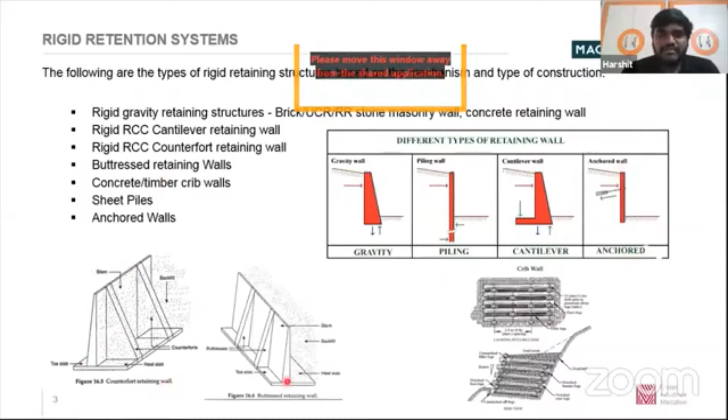The conventional retaining structures would be gravity retaining structures, which are built with bricks or rubble masonry stone walls, or it could be a cantilever wall, an anchored wall, or a piling wall. It could be a counterfort retaining wall, or a buttressed retaining wall, or concrete crib walls, wherein concrete logs are placed, and into the concrete logs the soil or stone will be added. So these are the general conventional retaining systems available in the market. These have certain disadvantages.

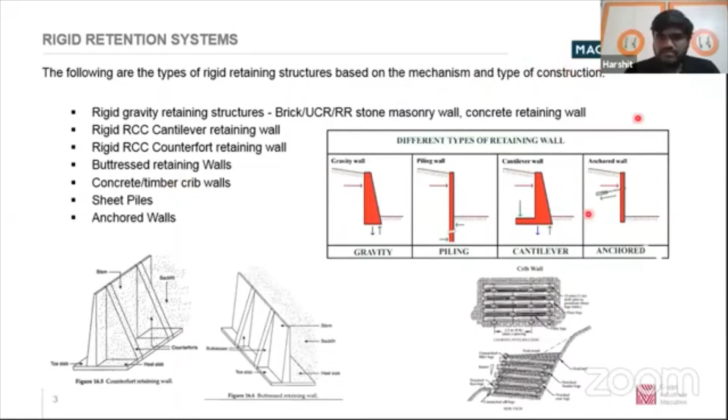Yeah, these rigid conventional retention systems have certain disadvantages. These are usually limited to certain heights. Beyond a certain height, we may not be able to construct this kind of retention system. These retention systems cannot tolerate large differential settlements, as they are rigid and not flexible in nature. So even slight settlements may affect the whole structure.

Since these are heavy structures, we may have to bear large foundation pressures. Because of these large foundation pressures, we may have to go for deep ground improvements and all, so it will again become costly. These kinds of rigid structures have poor seismic response because they attract large inertial forces in case of seismic activity, and hence failures may occur due to their rigidity.

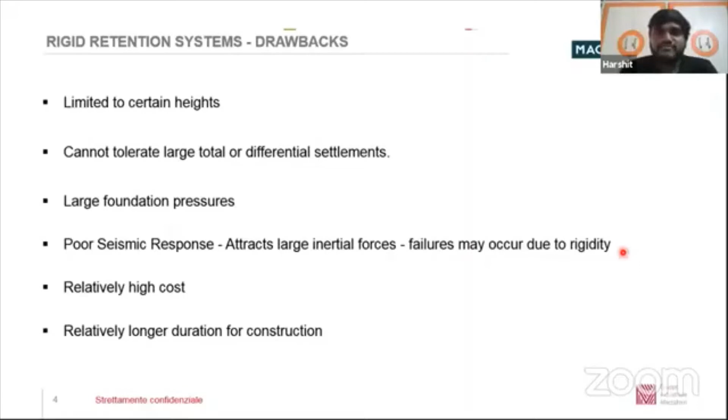And it is relatively high cost, and it also takes a longer duration for construction because of the various bar bendings and curing requirements. So to avoid all these drawbacks, knowingly or unknowingly, a reinforced soil system has been used from the ancient past, and reinforced soil walls have emerged.

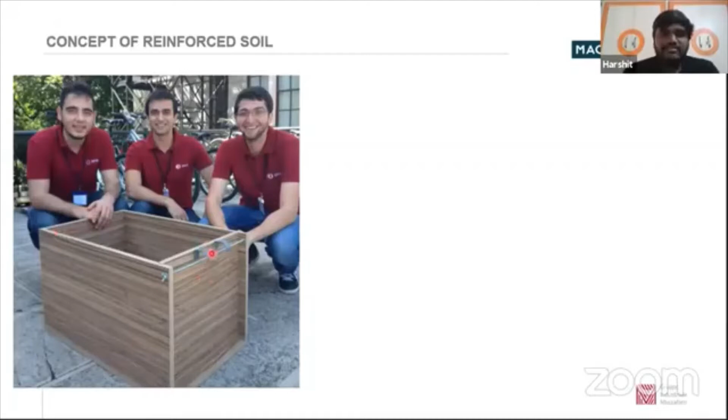And to understand more about the reinforced soil concept, let us go through an experiment. So here you can see a wooden box. On one side of the wooden box, we have a detachable frame, so this can be detached. What they are trying to do is they have taken a piece of paper and they are trying to replace this wooden frame with it.

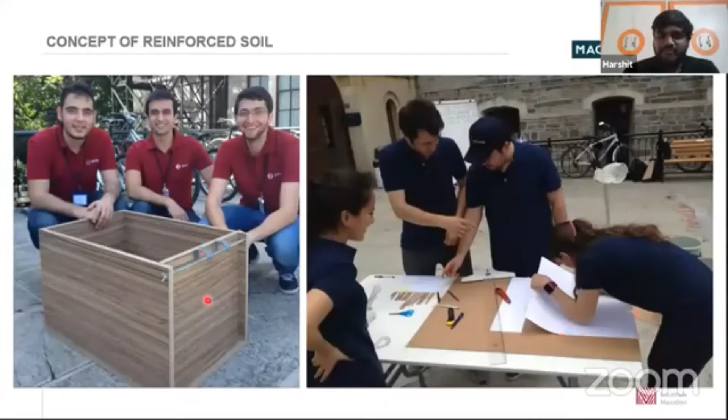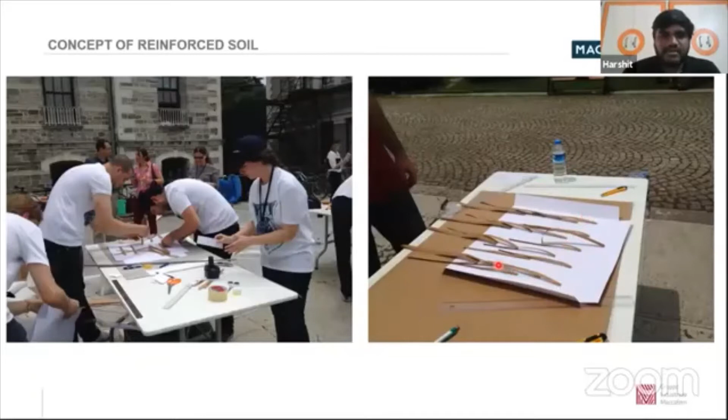And now with this piece of paper, they are adding certain reinforcement. They are cutting strips of paper and attaching them to this sheet at certain levels. Now here you can see this sheet. In this sheet, we have attached reinforcement strips, also a paper kind of material, at different levels. And now they are placing this paper along with the reinforcement strips along one side of the wooden frame.

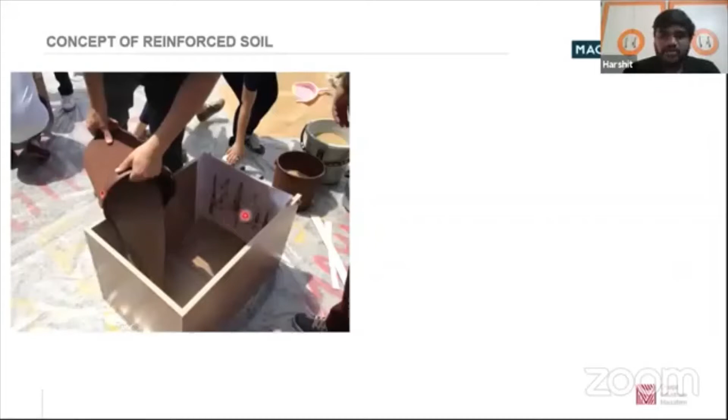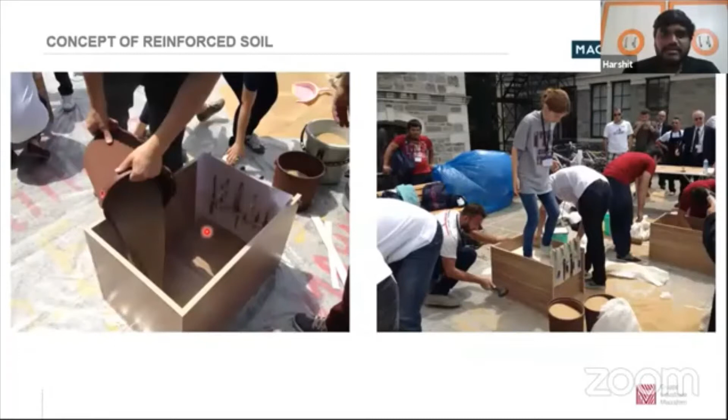So now they are pouring soil into this wooden box, and as you can see, they pour it to a certain level and place the paper strips, and then again they pour soil and compact it. As you can see here, they are compacting it.

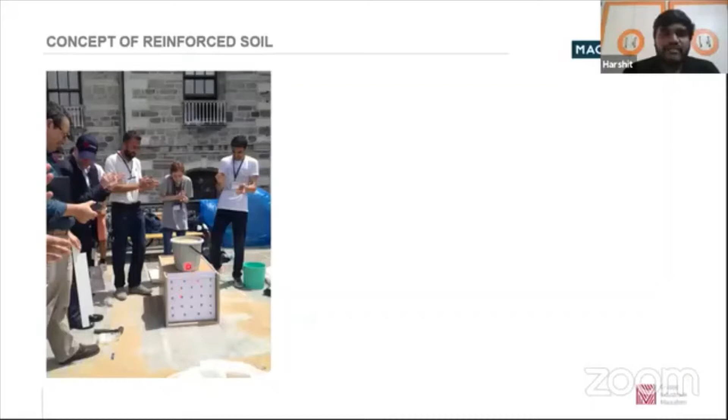And now, with just a sheet of paper and even with a load through a bucket full of soil, this structure, with a normal sheet of paper and certain strips of paper as reinforcement, is not failing anymore. So it is able to retain. As you can see, they have put a lot of load over the soil. Even with the extended loads, this is not failing.

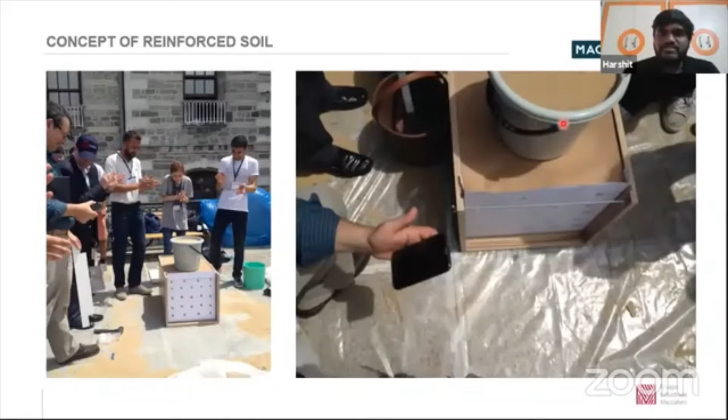So this is the concept of the reinforced soil wall. Basically, as you all know, just like RCC structures, just like concrete, soil is also strong in compression but weak in tension.

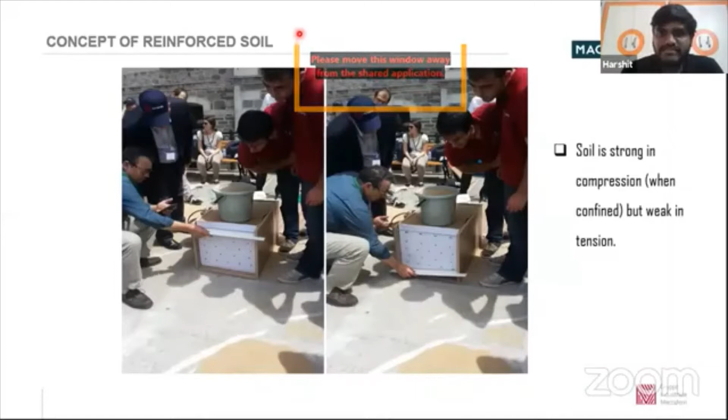So moving further, what is a reinforced soil structure? Reinforced soil structures are a form of mechanically stabilized structure that incorporates planar reinforcing elements which can bear tensile stresses. Whatever reinforcing elements we provide in the soil take the tensile stresses. The source of this resistance to tension is the internal friction developed between the soil and the reinforcement. So the basic transfer mechanism in reinforced soil structures is friction generated between the reinforcement and the soil.

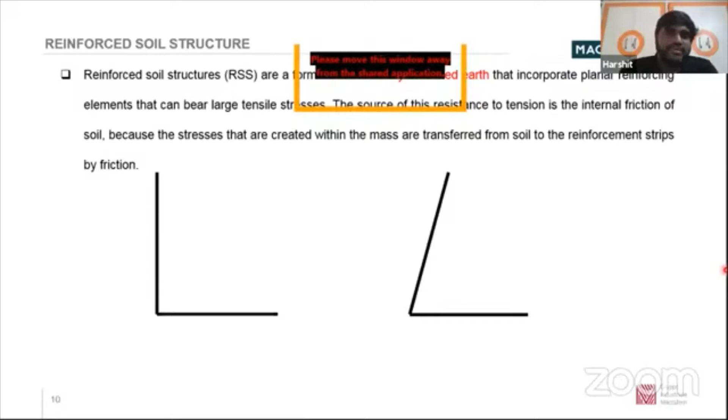So now, what is meant by a reinforced soil wall and what is meant by a reinforced soil slope? We need to understand what is a slope and a wall. When the slope angle is greater than 70 degrees, it is defined as a reinforced soil wall as per the codal provisions. And if the angle is up to 70 degrees, it is considered a slope.

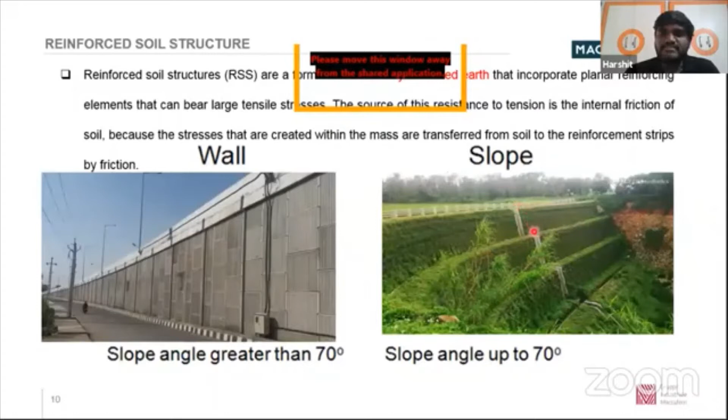As you can see, this is a vertical wall, so this can be defined as a reinforced soil wall. Similarly, here this is constructed as a slope and it is less than 70 degrees with the horizontal. This can be considered a reinforced soil slope. So this is how we differentiate a reinforced soil wall and a reinforced soil slope.

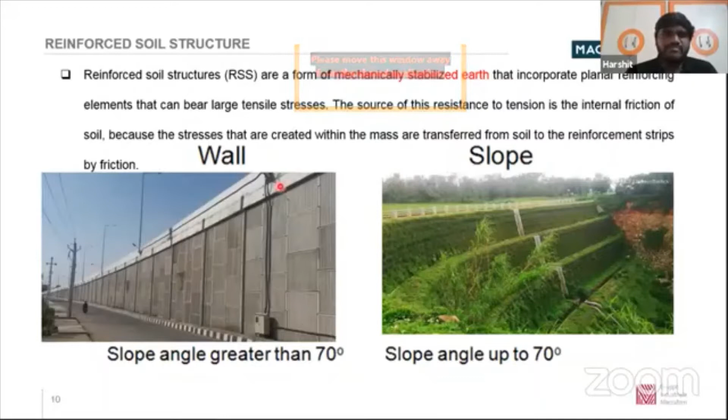So now, what are the basic components of a reinforced soil structure? In general, there should be a facing element. The facing element is one of the major components, which holds the soil particles in place, so it should not allow them to fall down.

So this is just a facing element. And then there is a reinforced soil and retained soil. Fill material is important, since the fill material is the major one which is used to generate the friction between the reinforcement and the soil. So this fill material selection will also be important.

This is also a major component. Whatever the fill which is behind the reinforcement, geosynthetic or steel reinforcement, this soil is called retained backfill. And another major important component is the drainage media. Water may percolate into the soil and it should be able to transfer. There should be a separate medium to transfer this particular water from the reinforced soil structure.

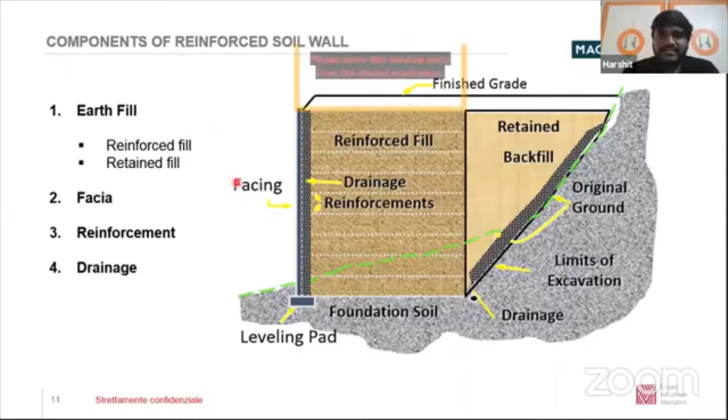These are the major components of any reinforcement: the facing elements, the fill material, the drainage medium, and the reinforcing elements. So let us go into each thing one after other. So reinforced soil wall fascia. Let us go with the fascia. These are the classification as per fascia.

So now you can see there we can go with different fascias. One could be a soft fascia, wherein, as you can see here, there is no particular fascia like that. You will be having geogrids or wraparound fascias. So we'll be having soil filled in the geogrids with the help of one geotextile as a separator.

And then we will be having stone fascia, like gabion boxes will be there in which stones will be filled. This is called stone fascia reinforced soil walls, in which geogrids can be placed as a reinforcement, or normal meshes will be placed as a reinforcement.

Other fascia that could be possible in case of reinforced soil structures would be modular blocks. Modular blocks are nothing but the small blocks, just like brick-like structures, which is having a height of around 0.2 meters and the thickness will be around 0.3 meters. So these are just like brick-like structures, and in between geogrid layers will be placed.

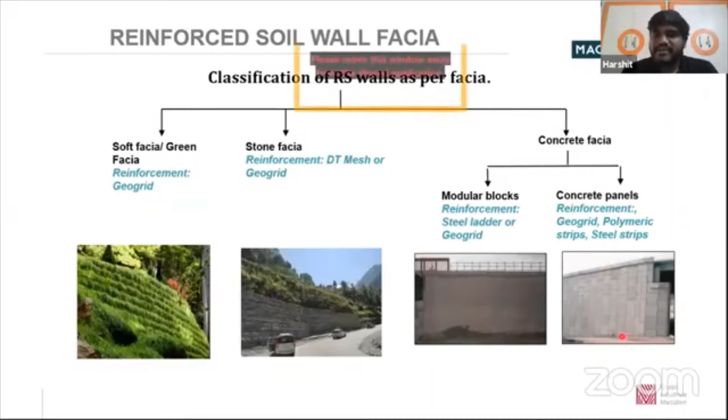And similarly, there are discrete concrete panels. Here you can see these are the concrete panels, wherein height of these panels would be around 1.5 to 1.6 meters and the width will be around 2 to 2.2 meters. So here various concrete panels will be placed one over the other, and then reinforced soil wall or slope will be formed. So these are the different kinds of fascia that is possible.

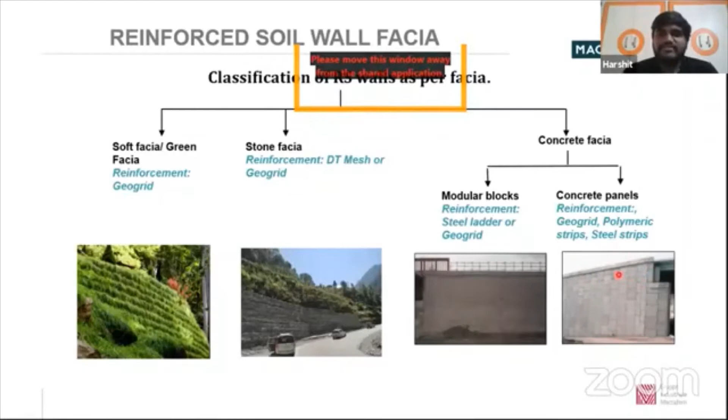And coming to reinforcement material, so there could be a geosynthetic reinforcement or a steel reinforcement possible. So if we go to the geosynthetics, when I want to define the geosynthetics, they are nothing but the planar materials which are fabricated or manufactured from polymer materials, and these materials, when they are in contact or used for geotechnical purposes, are called geosynthetic materials. So what kind of geosynthetic materials can be used in reinforced soil walls or slopes anywhere?

So the different types of geosynthetics that we can use is geogrids. Geogrids are nothing but grid-like structures which are formed from fibers. As you can see, these are the grid-like structures, formed from fibers. These are woven or knitted fibers, wherein they will take various fibers and knit them. And these are bonded fibers.

Here they will take various strips, geosynthetic strips, bonded with each other through thermal bonding, and they are formed. These are extruded geogrids, wherein a plain sheet of geosynthetic material, from that they will do punching and extrude this kind of geogrids. And it could be a geocomposite, wherein it not only does the purpose of reinforcement, it might also do the purpose of the drainage function also. These are called geocomposites. And then we can also go for geotextiles.

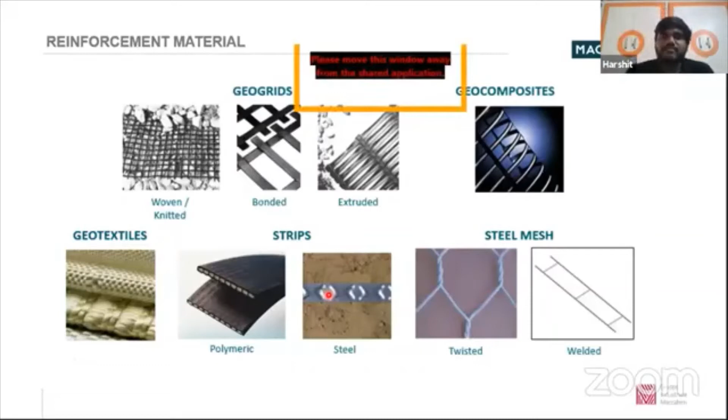With the advancement of geosynthetic materials, now we have totally avoided using steel strips, and in most cases only geosynthetic reinforcement is used, either in the form of grids, geotextiles, or strips. Geosynthetic materials are being used.

Now the third major important material in case of reinforced soil structures is the fill material. As said earlier, it should be a granular material. If I use a cohesive fill, the problem would be that friction between the soil and the reinforcement will not be developed. So in case of reinforced soil, it is always advisable to use a granular fill material.

The design will also depend upon the properties of the retained fill. Retained fill is nothing but the fill beyond the reinforcement. Whatever the geosynthetic reinforcement is providing, the fill beyond this reinforcement is called retained fill. These properties also need to be finalized before going for any designing purpose.

Not only normal fill, even mechanically stabilized soil or solid waste like fly ash or pond ash can also be used as a fill material in case of reinforced soil structures.

So what are the recommended properties suggested by Indian guidelines? The recommended properties for reinforced soil are: angle of internal friction shall always be greater than 30, and plasticity index should be less than 6. These are the guidelines given in MORTH and IRC SP 102, the two guidelines which we use while designing reinforced soil walls.

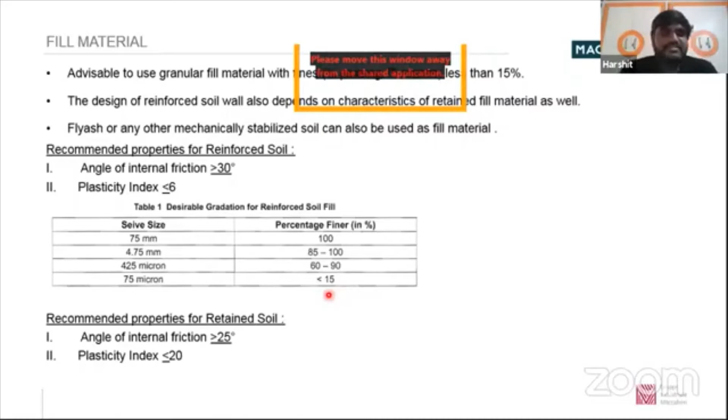Similarly, from ground level or from the existing road level, we need to go to the top, so in this case we need to build certain approaches. In building such approaches, we can use this kind of reinforced soil structures. It can also be used for railroads, where huge railway loading will be coming over the reinforcement.

In case of airports and runways, where aircraft loadings will be coming, this can also be used. Industrial and mine crusher walls we can use. Parks and gardens also we can use. Architectural stadiums and arenas we can use them.

For boundary walls also we can use in case of residential and commercial development projects, for boundary walls or compound walls, such kind of reinforced soil walls or slopes. Again, for waterfront structures also we can use this reinforced soil walls.

Going further, how to design reinforced soil walls? Is it different from designing a normal retaining wall? No, it is not. It is similar to the design we do for a normal retaining wall. Slightly there will be certain changes recommended since we are introducing geosynthetic reinforcement or steel reinforcement into the soil. We may have to do some checks for that reinforcement also. This is the additional design which we need to do.

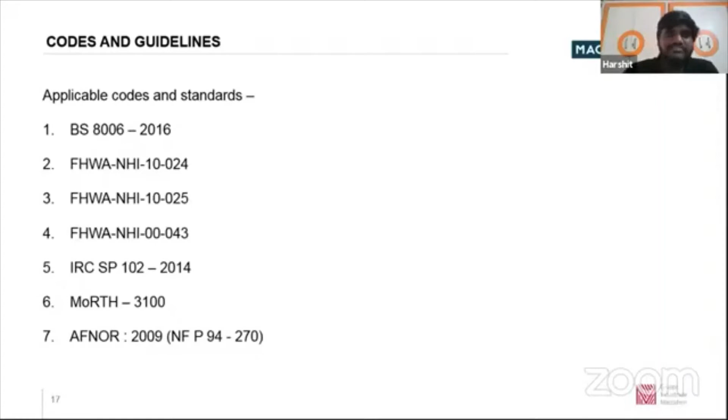So what are the various guidelines available? What codes are applicable? BS 8006 2016, this is the British Standard Code. In India, we are mostly using this code along with FHWA 24, 25 and 43, IRC SP 102, and MORTH and AFNOR codes. AFNOR code is a French code. So all these codes we are using while designing reinforced soil walls. IRC SP 102 is a recent code which is almost same as BS 8006, developed with reference to BS 8006. So these are the various guidelines which we use while designing reinforced soil walls.

So what is the basic design principle? Reinforced soil walls are usually designed for ultimate limit state and checked for serviceability limit state. Just like normal RCC, where we do a design based on ultimate state, and based on serviceability we'll check the deflections, wall cracks, crack widths and everything. Similarly, reinforced soil walls are also designed for ultimate limit state, and they are again checked with serviceability limit states.

So the limit state design philosophy for reinforced soil walls and abutments shall be implemented similar to concrete structures. The loads will be increased by certain partial factors, and the strengths will be reduced by certain factors. So when coming to ultimate limit state, we will take care of the collapse of the structure, and we'll also take care of the very high deformations. While coming to serviceability limit state, we will check the minor deformations.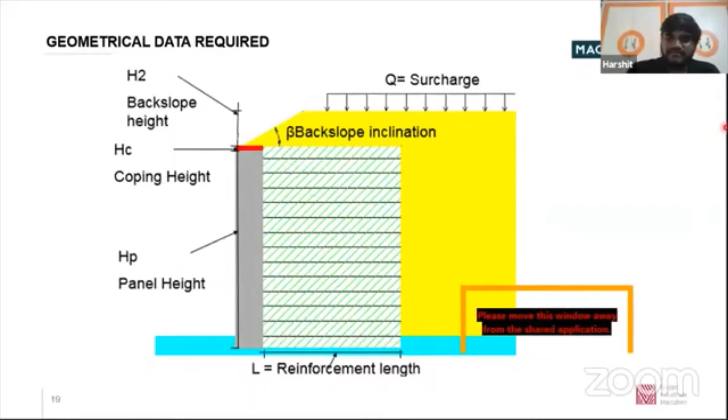So now, what are the various configurations of reinforced soil walls that are possible? This is a simple reinforced soil wall wherein there will be a facing, there will be reinforcement, and nothing more than that, with a road coming over it. It could be a back-to-back wall wherein two reinforced soil walls come together, providing reinforcement on either side. There could also be a trapezoidal wall, which is provided in case when there is a hillock along one side, so we may not be able to provide complete reinforcement - we'll provide reinforcement in different layers of different lengths.

It can also be a shored wall wherein a stable rock profile will be there, and we can provide reinforcement till that rock profile, or do anchoring into that rock profile. We can also go for bridge abutment kind of structures, where instead of the normal RCC abutment, we provide a reinforced soil wall abutment wherein the bridge girders rest directly over the reinforced soil wall, which takes the entire load. There can also be a tiered wall, wherein two reinforced soil walls are constructed in steps - after a certain width, we provide the next reinforced soil wall. So these kinds of configurations are possible in case of reinforced soil wall structures.

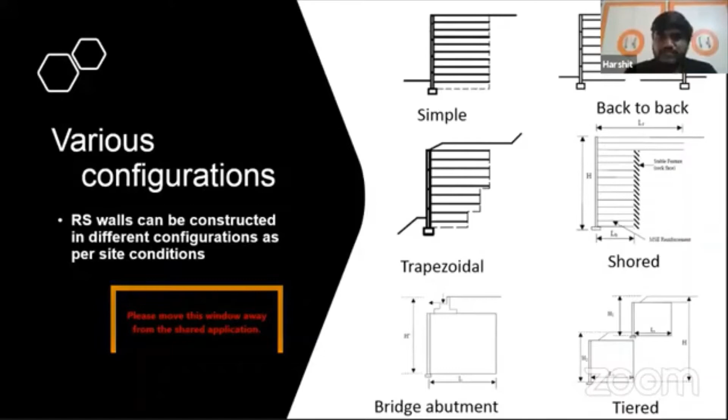So what are the dimensioning of these reinforced soil structures? When I say codal guidelines, I cannot provide 1 meter length of geosynthetic reinforcement. Code has suggested we should always go with minimum reinforcement length as 3 meters. So for any height, even for a 1 meter height of wall, code has suggested to go with 3 meters of reinforcement length, or 0.7 times the height of the wall. If the height of the wall is 10 meters, we need to provide a minimum of 7 meters. So it should never be less than 7 meters. These are the guidelines provided by IRC SP 102.

What is the minimum embedment depth? When I say embedment depth, a reinforced soil wall should be embedded into the ground. So how much depth should it be embedded? Minimum 1 meter has to be embedded into the soil. So these are certain structural dimensionings or thumb rules provided by the Indian Roads Congress, IRC SP 102.

And then what are the various loadings that could be occurring in case of reinforced soil wall? What are the data which you need to collect before proceeding with the designs? So there is a reinforced soil wall, and over it there will be a dead load. Dead load could be the load of the pavement crust coming over the reinforced soil wall, or it could be the dead load due to the surcharge. In case of partial height walls, where the RS wall is constructed for a certain height and after that an embankment is provided, this dead load shall also be taken into consideration.

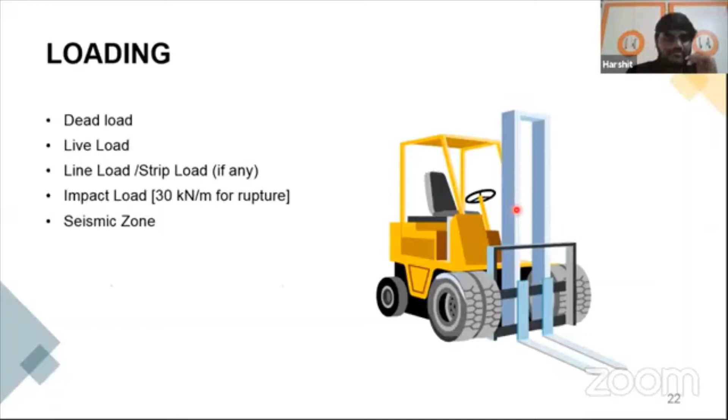So in the designs, what are the things that we need to analyze? Two things we need to analyze. One is external stability and the second one is internal stability, for both static and seismic conditions. When I say static, it is a normal condition. When I say seismic, it is the functioning and stability of the structure in case of an extreme seismic event. So this also has to be checked.

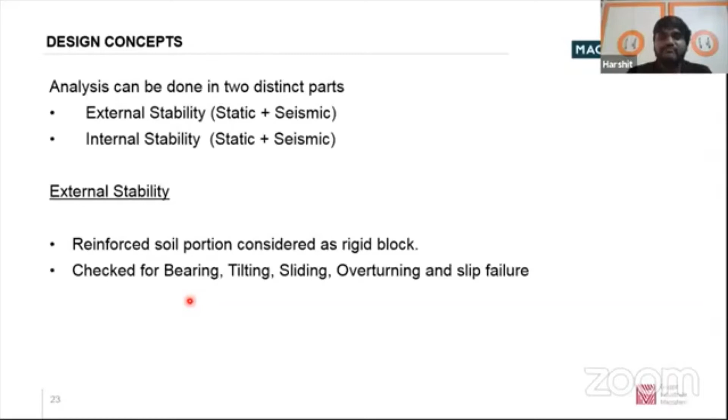When I say external stability, just like any normal retaining wall, this structure has to be checked for bearing, tilting or overturning, sliding, and slip circle failure. So all these external stability checks which we do in case of a normal retaining wall have to be performed. In the RCC retaining wall, the self weight of the RCC structure is taken as a stabilizing force. In case of reinforced soil structures, the reinforced soil block is taken as a rigid block, and the weight of this reinforced soil block is taken as a stabilizing force. This is the only difference when we do an analysis.

So as I told, in external stability, if I say this is my reinforced soil wall and this is the reinforcement, we need to check sliding. This particular structure shall not slide in case of any event, or in the normal case also. So the design has to be performed in such a way that all the stabilizing forces are greater than the destabilizing forces. Whatever the loads or lateral pressures coming over the wall from the retained fill or the backfill shall be resisted by this reinforced soil block. So this has to be taken care.

So tilting failure: it should not overturn. It should neither slide, nor should it overturn. Or bearing failure: due to the heavy loads from the reinforced soil, based on the in situ soil properties, it should not fail in bearing. And the overall stability needs to be checked based on the in situ soil condition. It should not slip. Slip failure should not occur. So slip failure analysis should also be done in case of reinforced soil walls.

Apart from this stability, we also have to perform internal stability. When I say internal stability, it is the stability of the structure layer wise. We are providing reinforcement everywhere; as per Indian guidelines, the maximum vertical spacing of the reinforcement has been limited to 0.8 meters. So for every 0.8 meters, we will be providing a reinforcement layer. This reinforcement, geosynthetic layer or steel layer, whatever may be the reinforcement, should not fail for any loads coming over it. If it fails, the whole structure will fail. So we need to design this structure internally also, not only externally for sliding, overturning, tilting, bearing. Internally also, this particular structure should be stable.

So what are the checks that we need to do? One thing is rupture. Whatever the load coming over this particular reinforcement layer, the strength of the geosynthetic reinforcement should be greater than the load coming over it. So this has to be taken care. The reinforcement strength will be in kilonewtons. Whatever the strength is, it should always be greater than the vertical loads coming over it. So the reinforcement shall not fail in rupture. It should not rupture because of the heavy loads coming onto it.

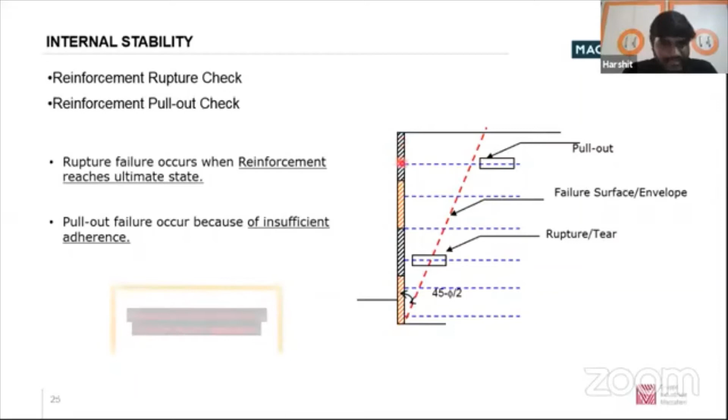Apart from this, we also have to check: there is a reinforcement, there is a concrete panel. If I say this panel will be just 180 mm thick, so 0.18 meters thick, this reinforcement and panel will be connected through a connection arrangement. So the connection strength requirement should also be checked while designing a reinforced soil wall. For every layer, you need to check the connection strength: what is the maximum load coming at the location, and whether the connection provided at this particular location is able to take it, or whether this connection will fail and pull, and the structure will be affected. So this shall also be taken care while doing the internal stability check.

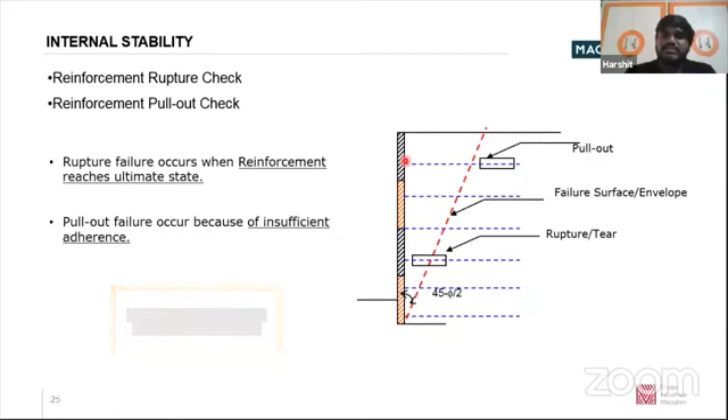So as I said, the fourth major component would be the drainage for reinforced soil walls. If a huge amount of water is accumulated and we are not draining that water, apart from the actual lateral earth pressures, there will be certain hydrostatic pressures also. If we have not designed for the hydrostatic pressure, and because of high intensity rainfall the water has percolated into the soil, there will be possibilities of failure. So drainage shall also be taken care of while designing an RS wall. Conventionally, a filter media of 600 mm thick behind the reinforced soil wall is provided. Not only for a reinforced soil wall, for a normal retaining wall also.

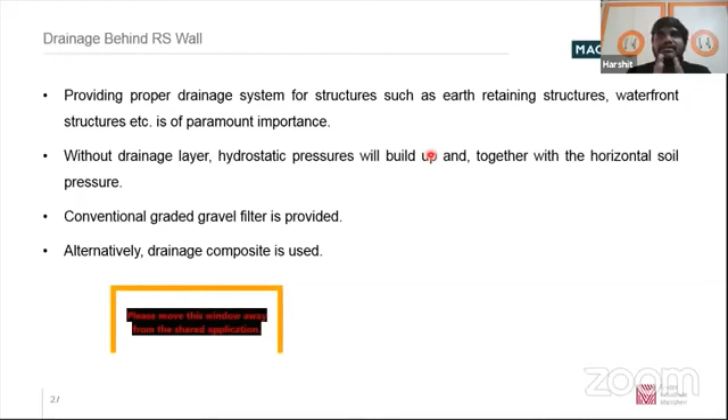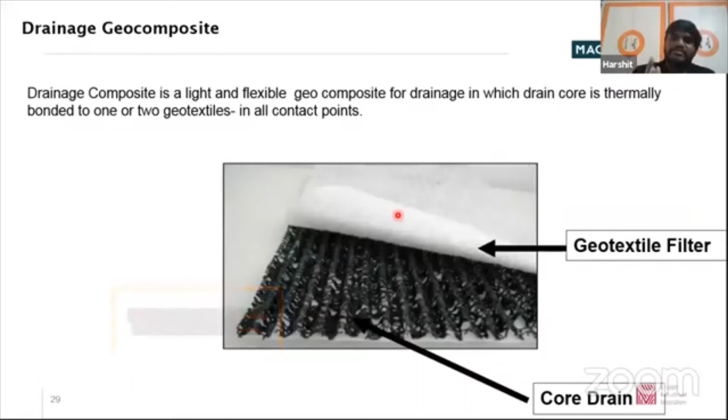To describe more, these are the geocomposite drainage composites. These are flexible composites used for drainage purposes, and they have a core material through which water will pass, and a geotextile filter. This will allow the water to pass into it, and it should also act as a separator layer. It will not allow soil to percolate into it, so it should not block. Let's see how these drainage composites are designed.

First of all, we have two different materials. One is the core; the other is the geotextile material, which is pasted to the core. The main function of the core is drainage. So we need to check the flow capacity or drainage capacity of the core net based on the intensity of the rainfall in the location. We need to calculate the quantities, and then check whether this core is capable of transferring the quantity of water collected at this location, whether it has that capacity or not.

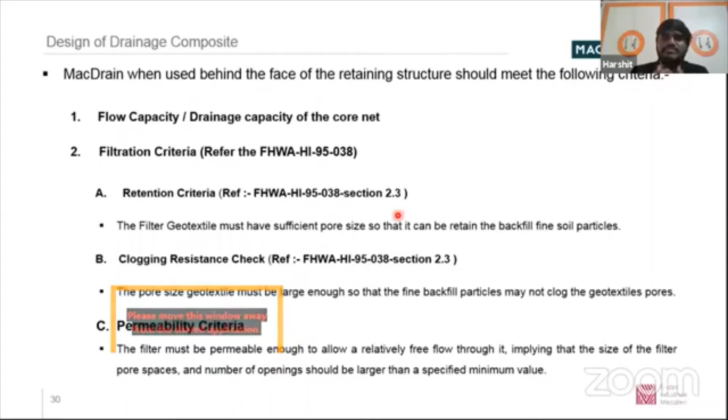As said, filtration criteria: retention. For the geotextile, we need to check the retention. This geotextile will have pores, and the filter geotextile should have a suitable pore size so that it retains the soil and does not allow it into the geotextile. If soil enters the geotextile, over a certain period it will clog. So a clogging resistance check shall also be done. And it should be permeable, allowing whatever water is coming to pass through it, so a permeability check is needed too. All these things have to be checked before proposing any drainage media.

So these are the basic components and general guidelines provided in Indian codes and MoRTH guidelines. Let us go further with a few case studies. Today I will cover only the case studies with concrete fascia, as my colleague Narendra will cover the case studies related to soft fascia and stone fascia in the next session. So I will cover concrete fascia, or hard concrete fascia. These are a few case studies.

One of the first projects in India was constructed in Ludhiana in 1988. Here is the first reinforced soil wall, built in 1988. The geosynthetic reinforcement used here is polymeric strip, which is usually called Paraweb. A journal paper was also published in 1994.

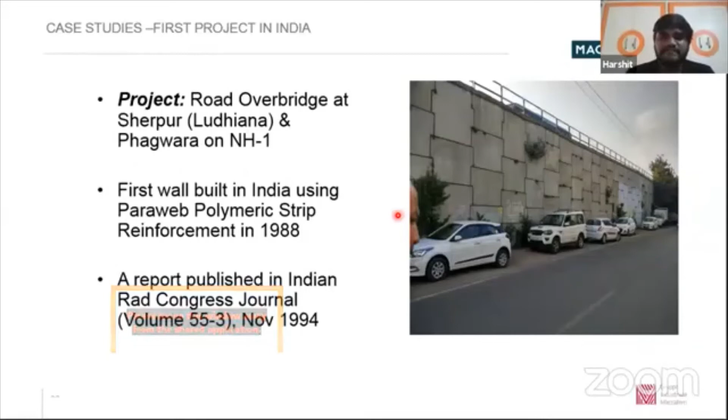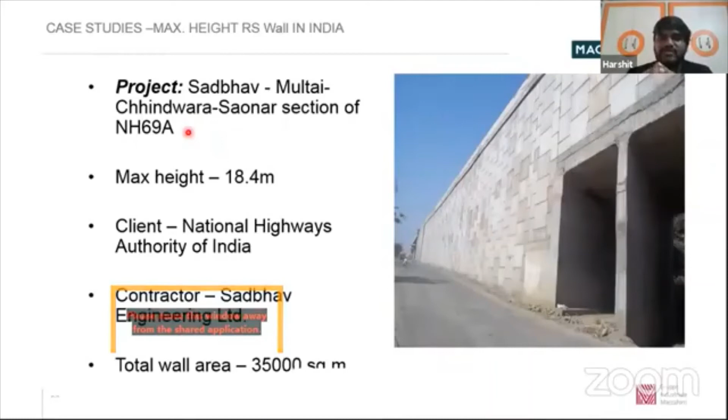There are many structures without any intermediate berms with a concrete fascia. The maximum height of a wall constructed without any berms or offsets in between is 18.4 meters. This was constructed in Chhindwara, and it has a total area of around 35,000 square meters. Those two are highway projects. And what about the boundary wall?

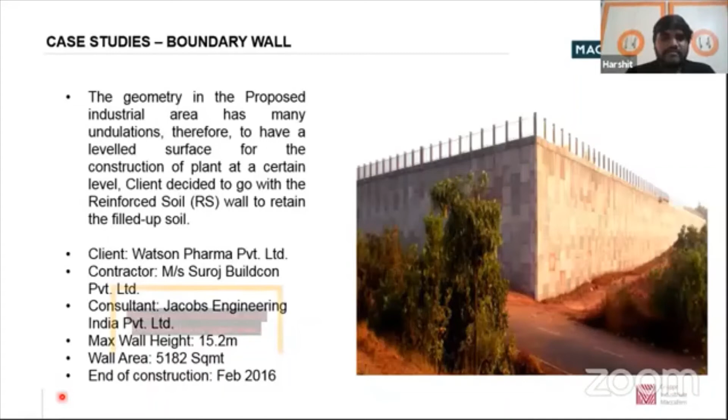Here, as you can see, in one of the projects the ground level was like this, and the client wanted to build an industrial area at this RL, at this grade. So to retain the soil, they constructed a boundary wall here in Goa. The maximum height of this wall is 15.2 meters. The reinforcement provided is geosynthetic strips. This is one of the boundary walls which we have constructed in Goa.

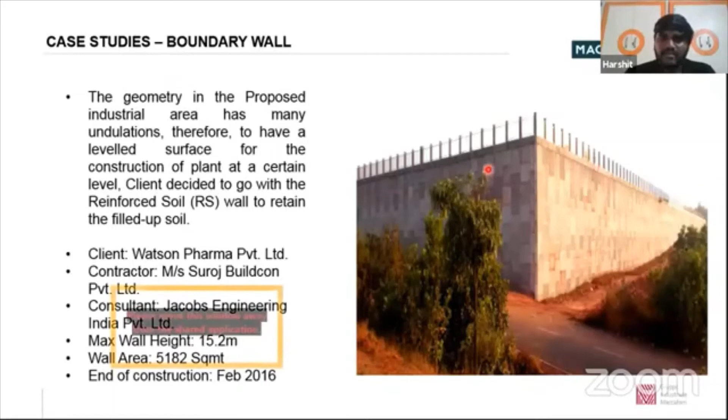So I would also introduce a few more case studies wherein, not only RS walls, there could be certain conditions where we cannot directly construct reinforced soil walls or any structure. Because of the subsoil conditions, the existing ground condition may not be good, and it may not be able to take the loads coming from the reinforced soil or any structure, let it be a normal RCC structure or reinforced soil structure. But the ground improvement required for a reinforced soil structure will be less when compared to an RCC structure.

So this is one of the case studies wherein we have a project where a railway crossing was crossing the port. This is the Mundra port in Gujarat. So they want to construct a rail overbridge, and for this rail overbridge, they want to construct approaches. The approaches have been planned to construct with reinforced soil walls with concrete fascia of 180 mm thick panels. This is the project location. This is the general thing.

So what are the problems which we have encountered? The foundation soil comprises of high clay material till 4 to 5 meter depth, and it was inadequate because of this clay material, because of the loads coming from the reinforced soil structure. The load bearing capacity of the soil was very less. So we need to improve the ground in order to construct this particular structure. Even the groundwater table is high, just 1 to 1.5 meters below the ground level. So these are the various problems in this particular project.

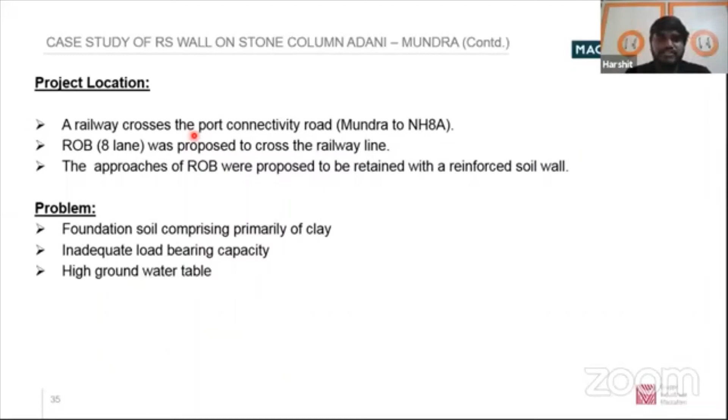So for this 9-meter high embankment, the required safe bearing capacity was around 27 ton per meter square. But based on Terzaghi's calculation, the available bearing capacity was around 10 to 15 tons. Based on the height, the bearing requirement will also reduce. So the existing soil has 10 to 15 ton per meter square of capacity. And when we have done the settlement analysis, the estimated settlement was well above the allowable settlement.

In case of reinforced soil walls, since these are flexible structures, wherein there will be certain joints in between, there will be bearings for every 1.5 meters. So these are able to take more settlement when compared to RCC structures. For RCC structures, the allowable settlement would be around 20 to 25 mm, whereas for reinforced soil structures, the allowable settlement as per codes is around 100 mm. However, in this particular case, we are getting more than 200 mm settlement.

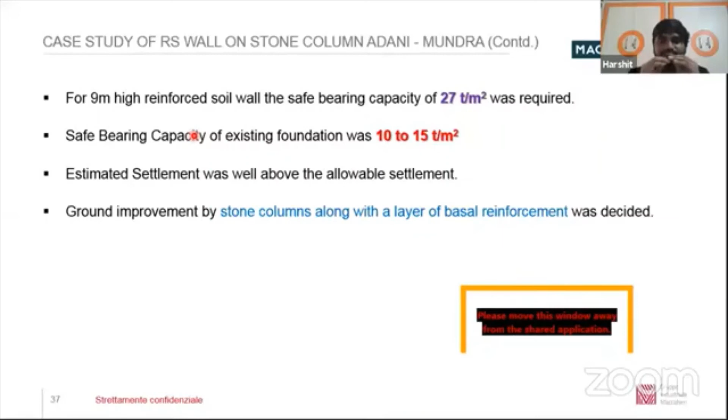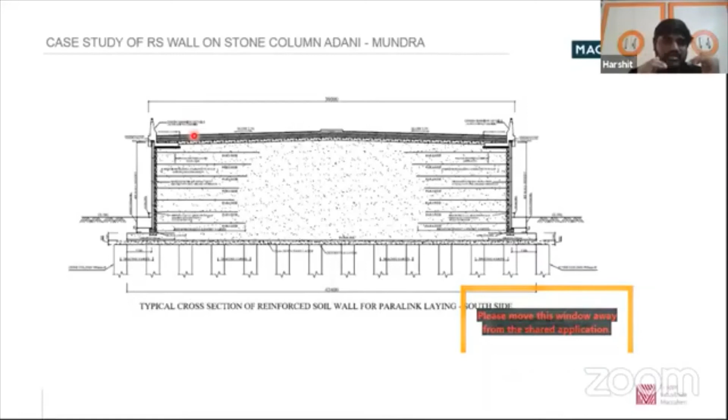So at the end, we have proposed ground improvement with a layer of basal reinforcement and stone columns. Basal reinforcement is nothing but a layer of reinforcement introduced below the ground level, just to have uniform distribution of load into the soil below. So this is the ground improvement proposed. The diameter of the stone columns which we have proposed is around 0.6, and the spacing has been based on the loads coming over the soil. The spacing has been varied from 2.5 to 1.5 meters.

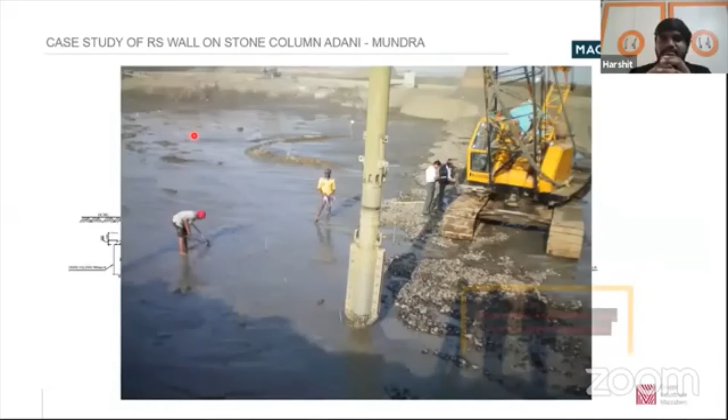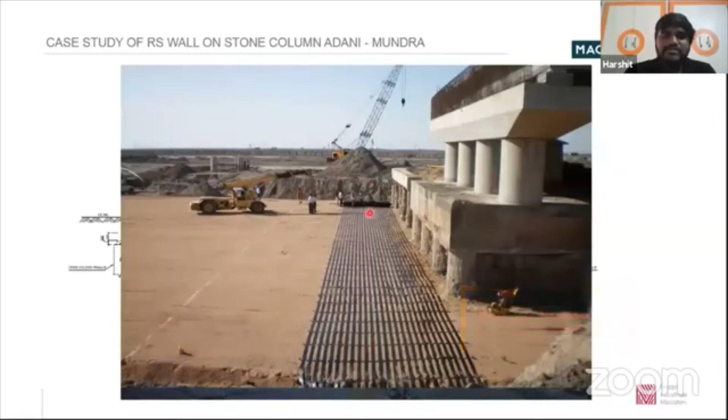As you can see, the boring has been done for the stone column installation. So these are the borings, and after drilling, the stones have been poured into it, and compaction will be done. Since we are providing stones, it's a self-compacting material. After providing a level surface, a layer of reinforcement has been provided, so that whatever loads are coming from the top will be uniformly distributed below.

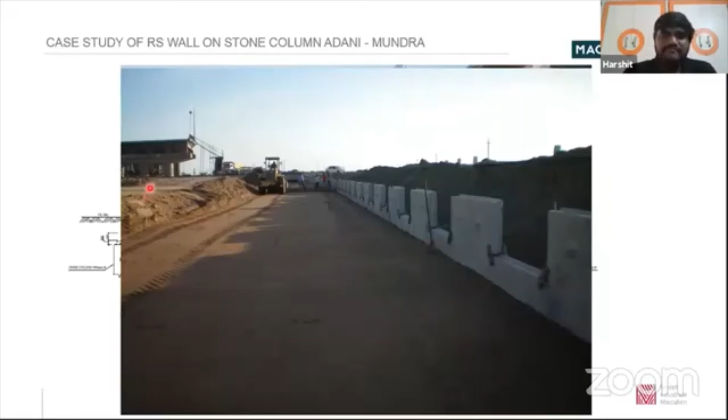So as you can see, after laying that reinforcement and after leveling pad, the reinforced concrete panels will be erected. As I said, there will be a certain element that is the connection through which the reinforcements will be connected. These are the connection elements, these are the facing elements, this is the reinforced fill, and the fill beyond this is the retaining fill. So this is during construction. After erection, you can see this is the structure.

So after complete construction, this is the whole structure, wherein beneath this stone columns have been provided and a layer of basal reinforcement has been provided. Since this is the port area, it has certain groundwater conditions. So in order to take care of all these factors, certain ground improvement measures shall also be done in case of reinforced soil walls also.

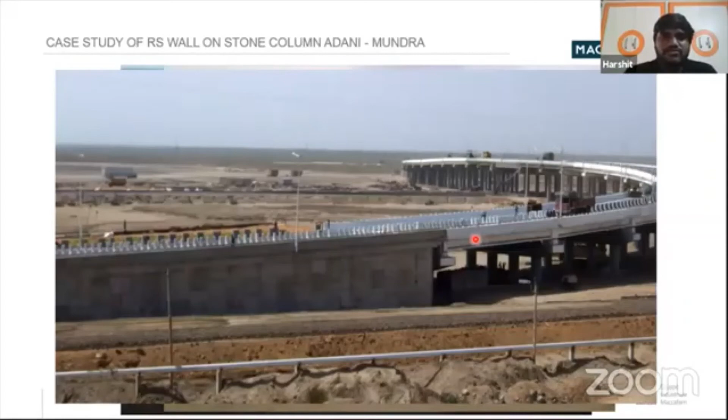So it will be having a passive pressure from the other side also. We'll be having an active pressure over this side, and a passive pressure over this side also. And we should try to avoid entering of water into this panel. So this embankment was prone to submergence. So water from the other end of the wall should not enter into the reinforced soil wall system. This is also one of the challenges. So waterproofing has to be done on the one side.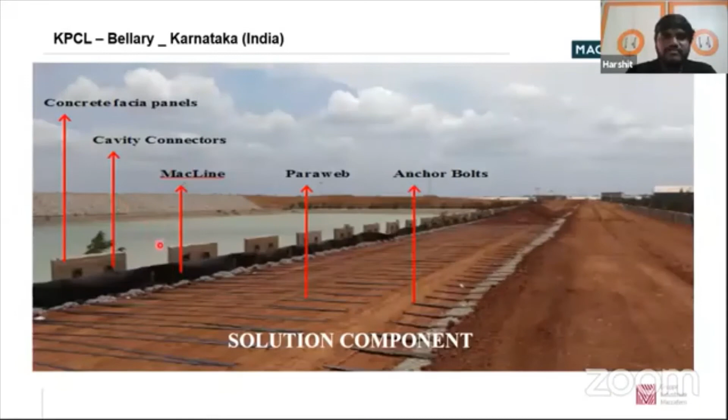So for this, various levels of water table have to be checked. For complete submergence of the structure, what would be the stability? For sudden drawdown, if the level has been reduced from 3 meters from the top to 10 meters from the top, so if the water level reduces, what is the stability of the structure? Since this is not uniform, just like backfill, the level of water might increase or decrease. So this wall has to be safe in all the conditions.

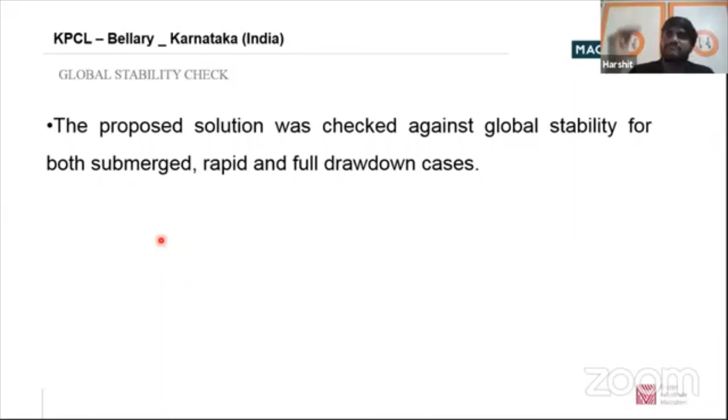So this has been checked for various drawdown conditions. If the water goes down completely, what is the stability? If the water comes up completely, what is the stability of the structure? And all these things have been globally checked. And once it is safe, then we will release the designs.

Along with the waterfront, here also there was an issue with the in situ soil. Here also the groundwater table is just below the RS wall, as you could see in the figures, and the topsoil is also weak. Since the topsoil is weak for 3 to 4 meters, we have provided sand piles, and a layer of geogrid has also been provided. This was primarily to control any differential settlements that could occur.

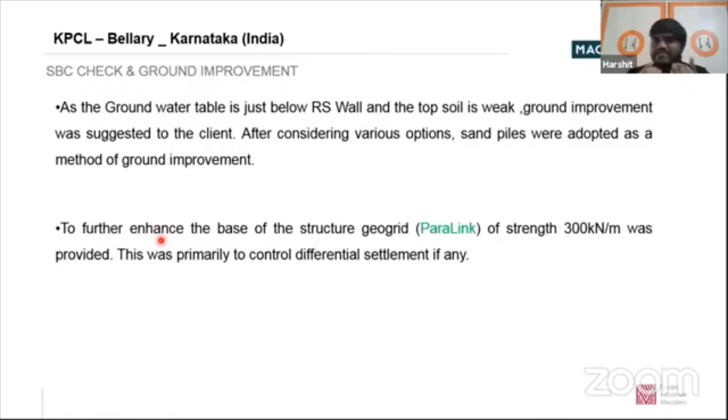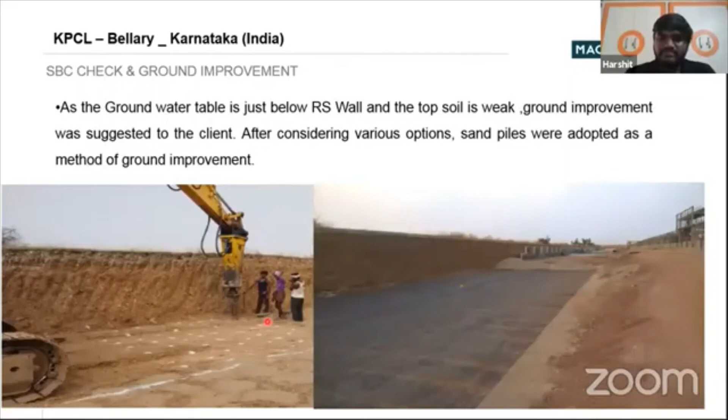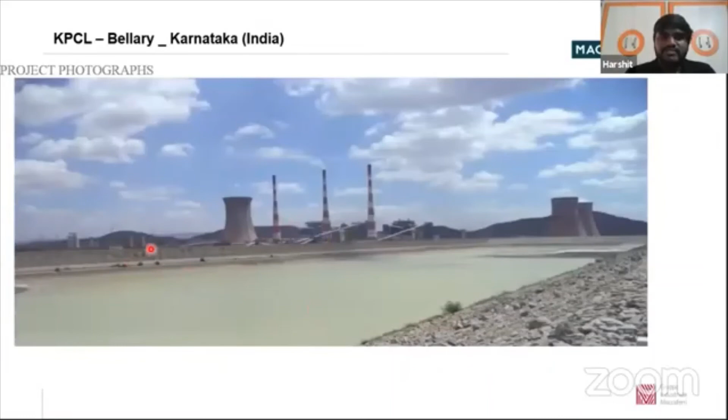So as you can see, installation of sand piles, they are readying everything. This is the layer of geogrid basal reinforcement which is being provided. So this is the completed project. This is the reinforced soil structure. Here you can see this is a thermal power plant. This is an ash pond dike, and this is the reinforced soil wall which is being constructed.

These are the few completed photographs. Not only this, there are a few projects that have been constructed for railway applications also in UK. We have constructed one of the structures with reinforced soil walls, wherein the loadings coming from the railway have been taken care of. This is one of the major applications which we are exploring in India.

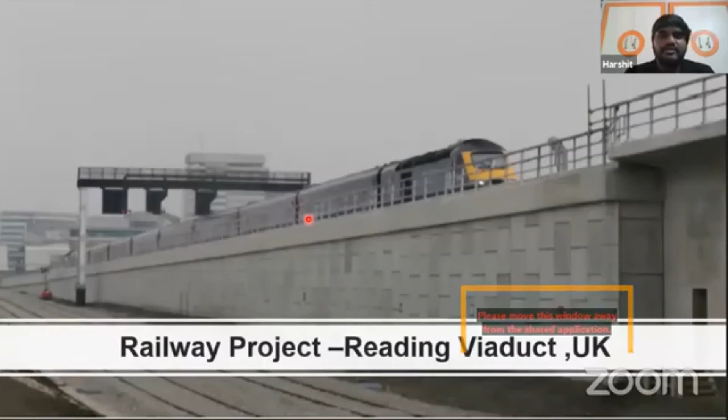Also in India, till now we are not able to do this particular kind of structures. Now we have started pushing authorities of dedicated freight corridors, and we have started doing one of these projects also. For this railway loading, the railway department is a little bit stringent whether this could be able to take the loads or not. We have shown various case studies done abroad, and now in India also we are starting to use this particular kind of technology for railway applications also.

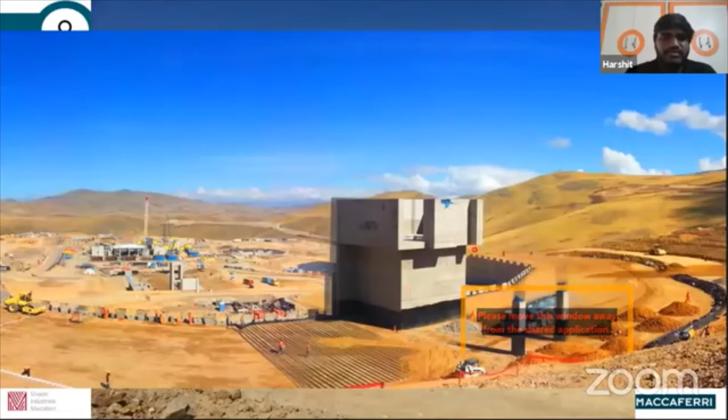Here is one of the projects in Peru wherein the height of the wall is 28 meters, and this is for a mine crusher wall. You can see this is the mine crusher wall, and here we need to construct reinforced soil walls so that the vehicles will go to the top and dump the waste.

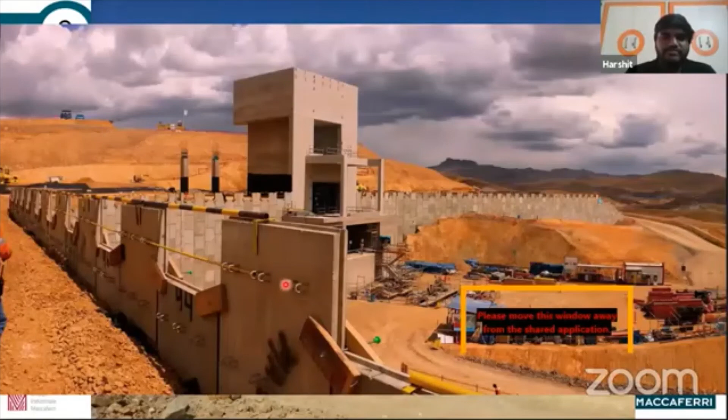Here you can see the reinforced soil wall being constructed, and here you can see the connections. This is called loop connection, with steel and loop and toggle connection. There will be a toggle coming over here, and the reinforcement will be connected through this. This is the wall which has been constructed at the end.

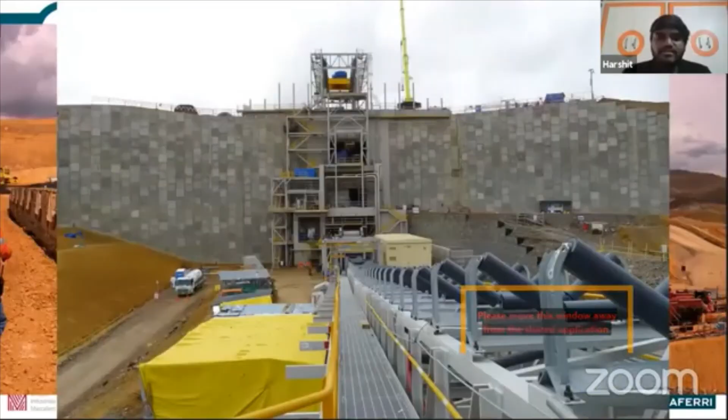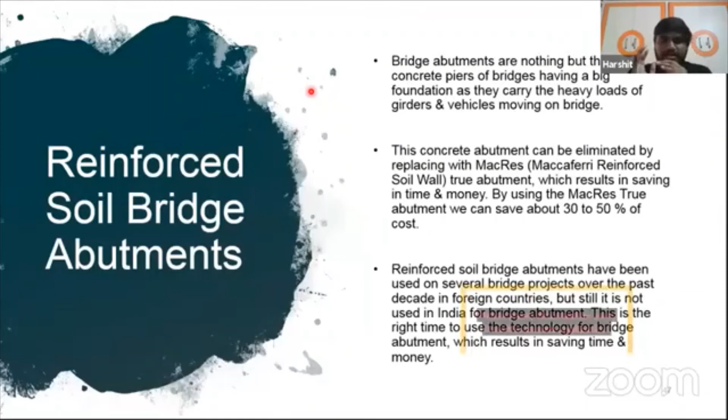So what are the major components in case of the bridge abutment? Just like a normal reinforced soil wall, since we will be having the girders resting over the reinforced soil wall, instead of having a pier or abutment over which the bearings and dirt walls and everything rest, we'll be having a bank seat. Over this bank seat, the girder will rest. The loads coming from the road and girder will transfer into the bank seat, and from the bank seat into the reinforced soil structure. This is a typical new application which has emerged in the recent past.

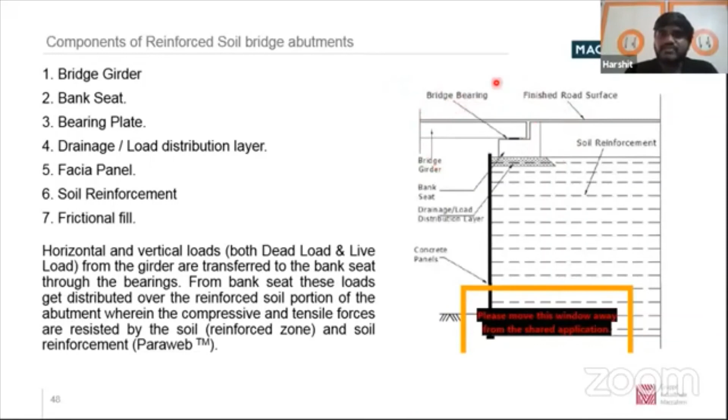So, reinforced soil walls true bridge abutments. As you can see here, ideally there should be an abutment constructed, similar to this. Instead of that, what we have provided is a reinforced soil wall abutment. This is also one of the applications of reinforced soil walls. So we can use reinforced soil walls in place of abutments also.